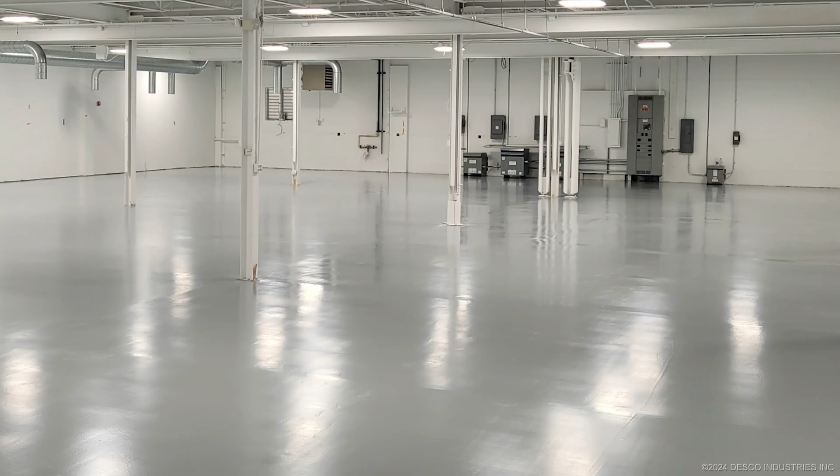Today we're going to give an overview of the Statguard conductive epoxy and everything you need to know about the application process. Statguard conductive epoxy is a waterborne, two-part epoxy floor coating formulated to control the dissipation of static electricity and provide a path to ground. Statguard conductive epoxy is very effective as a static control floor coating for electronics manufacturing, assembly, and storage.

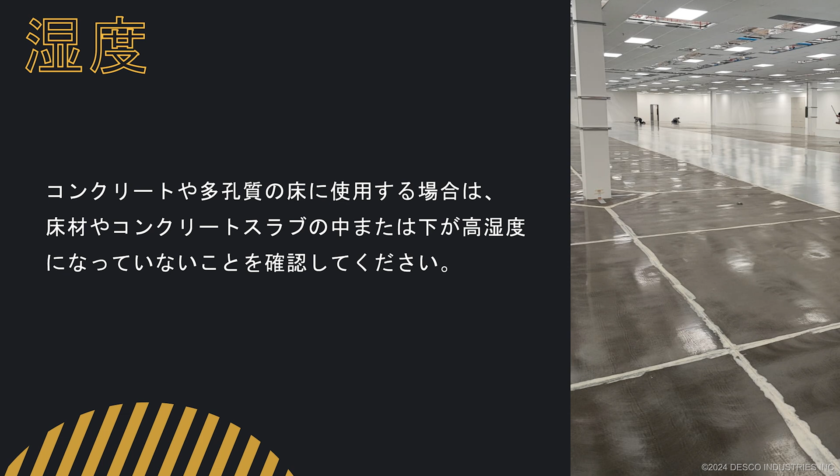For applications on concrete or porous surfaces, ensure there is no excess moisture in or below the material or concrete slab. Prior to installations, you will need to measure the MVTR of the concrete using the industrial standard test probes per ASTM F2170. The moisture levels cannot exceed 6 pounds per 1,000 square feet per 24 hours.

Ensure that your floor is porous and breathing well before performing the test. It is porous enough when a few drops of water dropped on the surface readily absorb within 30 seconds. If it is non-porous, then sand it with a very abrasive sandpaper to open it up. One test should be performed every 1,000 square feet of space.

For limitations, do not install when the relative humidity of concrete slabs exceeds 75%. And use only when the substrate temperature is between 65 degrees Fahrenheit and 85 degrees Fahrenheit. The proper floor pH before application should be 7. If the floor tests above pH 7, the floor must be neutralized before installing the Statguard conductive epoxy.

For concrete subfloor preparation, make sure to follow ASTM F710-11. In preparing concrete subfloors to receive floor coatings, fill all cracks, depressions, etc. with a leveling compound according to the manufacturer's specifications. Before beginning the application process, the surface must be clean, dry, free of oil, grease, release agents, curing compounds, laitance, other foreign matter, and must be structurally sound.

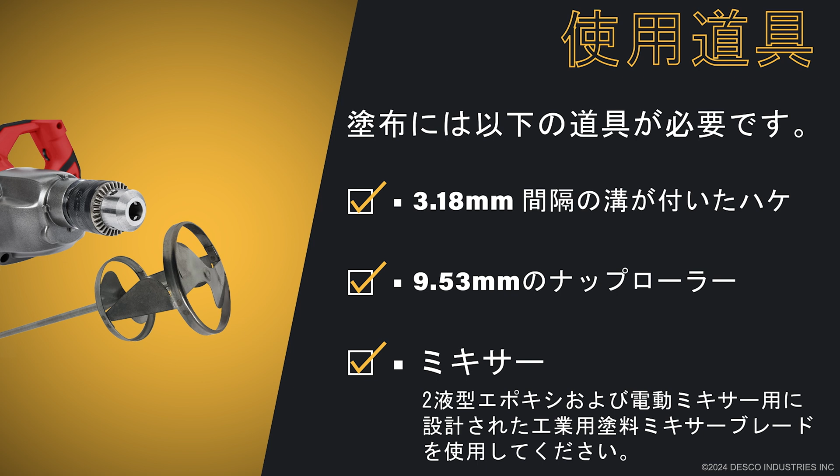For this application, you will need these materials: a 1/8 inch notched squeegee, a 3/8 inch nap roller, and a mixer tool. Use an industrial paint mixer blade designed for two-part epoxy and an electric mixer.

We recommend doing a test patch as it is a great way to demonstrate primer thickness options to gain the desired gloss. Test patch areas should be tested for adhesion and performance of the coating before applying coating to the entire floor. For more details on testing, make sure to view the technical bulletin posted below and on the Statguard flooring website.

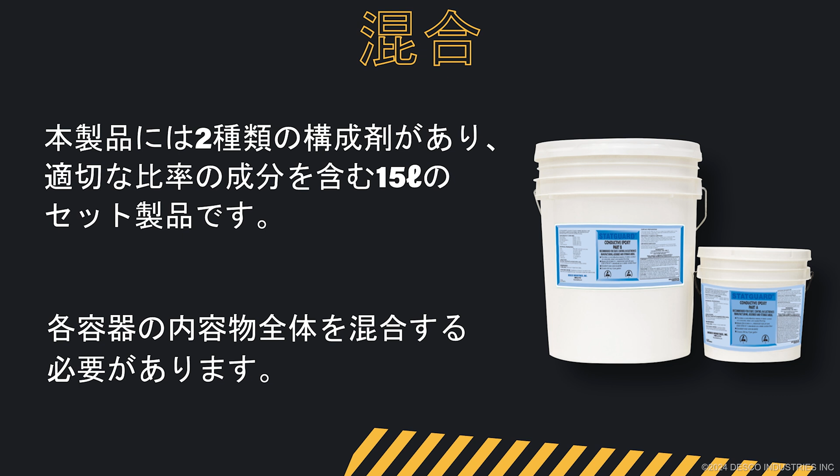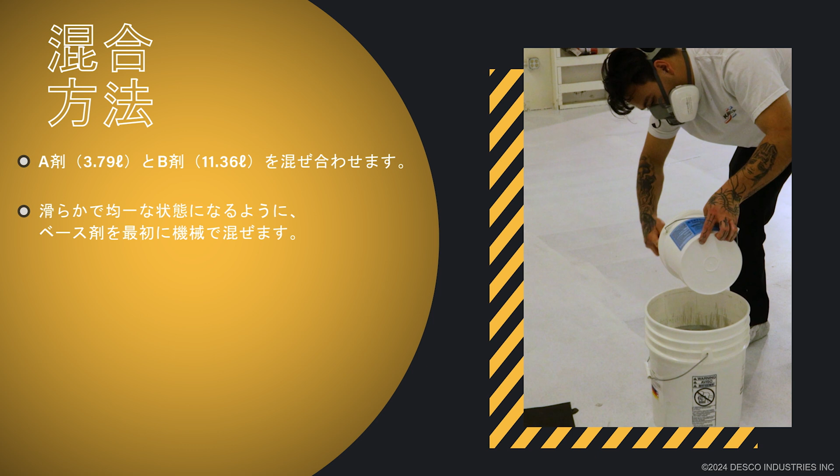Statguard conductive epoxy is a two-part product supplied in a 4-gallon kit which contains the proper ratio of ingredients. The entire components of each container must be mixed together. Mix part A, the 1 gallon, to part B, 3 gallon. Power mix the base portion first to obtain a smooth, homogeneous condition. After mixing base portion B, add the converter slowly with continued agitation. After the converter addition is complete, continue to mix slowly.

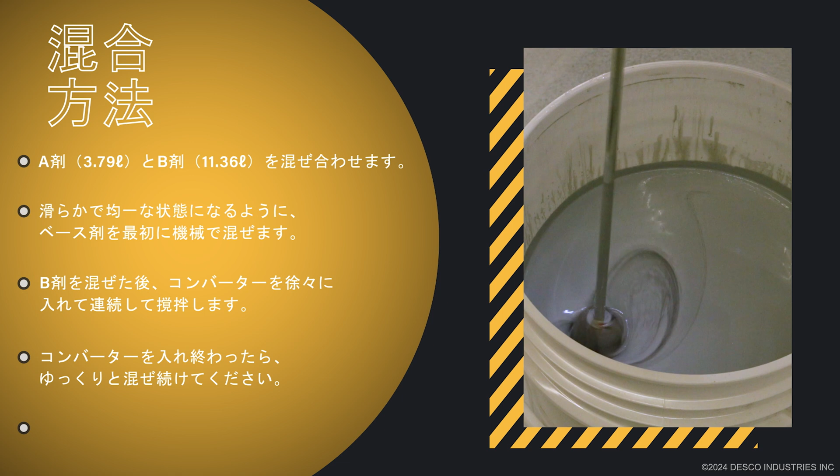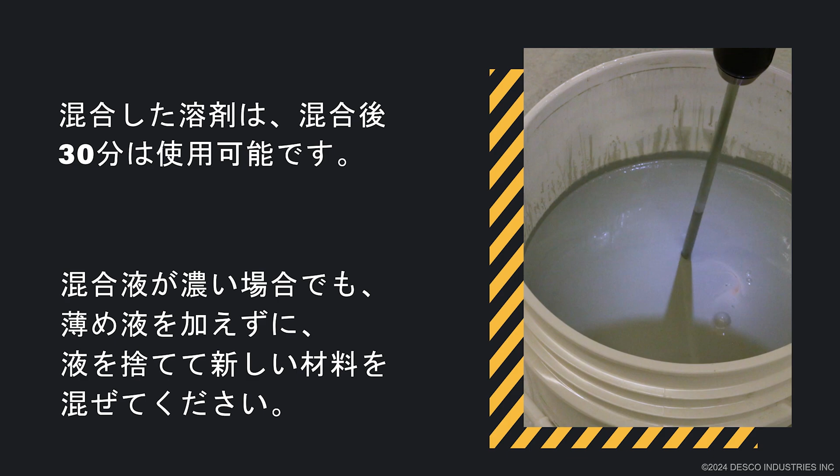Use immediately after mixing. Mixed material is usable for 30 minutes after mixing. If it thickens, do not add thinner, but discard and mix fresh material. Caution: thinning is not recommended. Adding water will reduce conductivity of the coating.

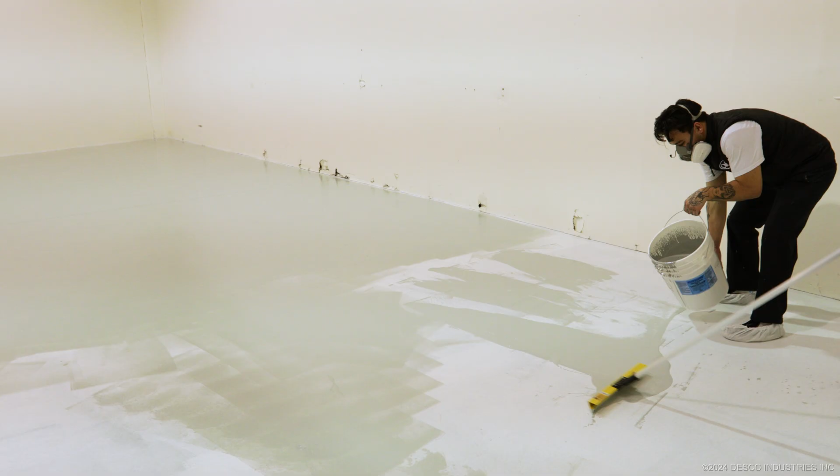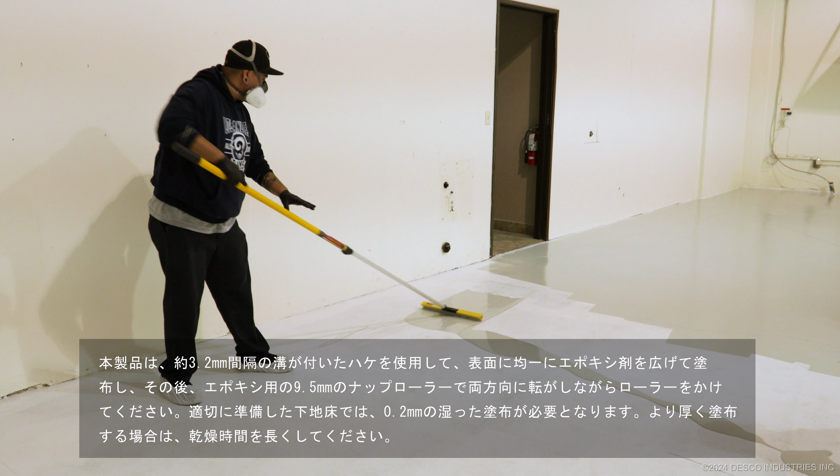Statguard conductive epoxy should be applied using a 1/8 inch notch squeegee to spread the epoxy evenly on the surface, and then back rolled in both directions with a 3/8 inch nap roller. With a properly prepped subfloor, only 8 mil wet coating is needed. If a thicker coating is applied, the dry time will be longer.

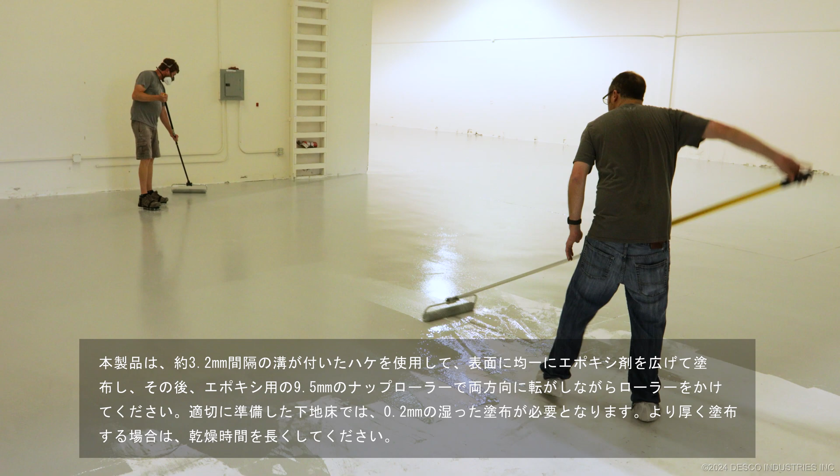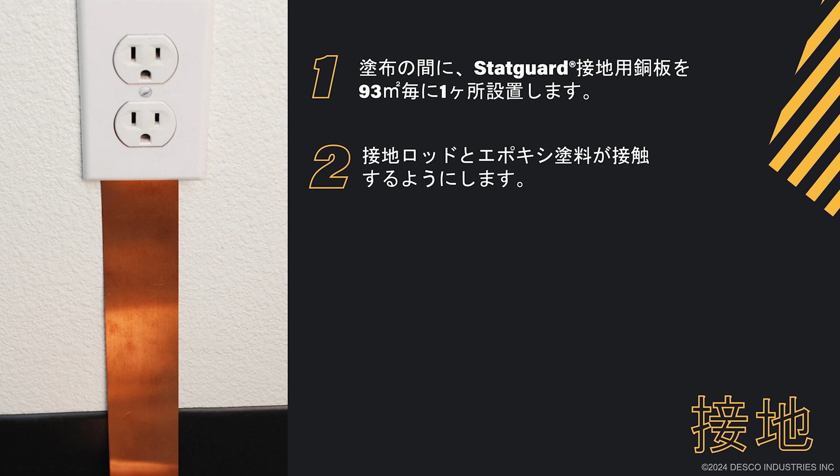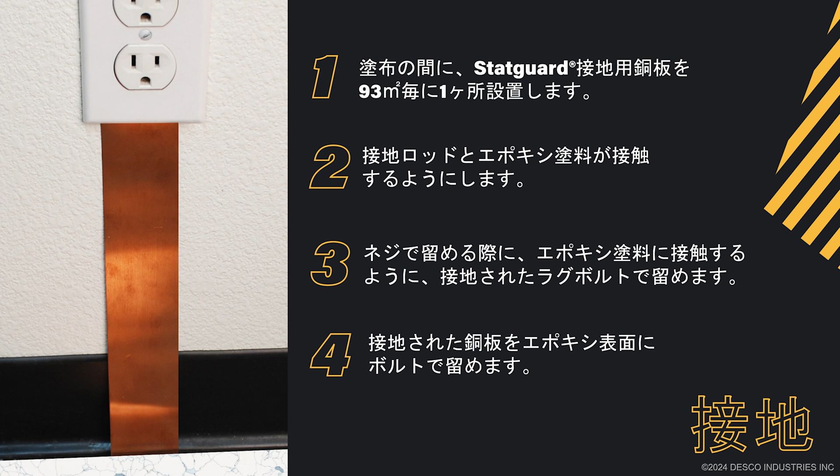There are 4 examples of how to achieve a grounded connection to the epoxy surface. One is installing a Statguard copper ground strip per 1,000 square feet throughout the installation. Second is bringing the epoxy coating in contact with a building ground rod. Third, install a grounding lag bolt to the floor so the bolt comes in contact with the epoxy when screwed in place, or bolt a grounded metal plate to the epoxy surface.

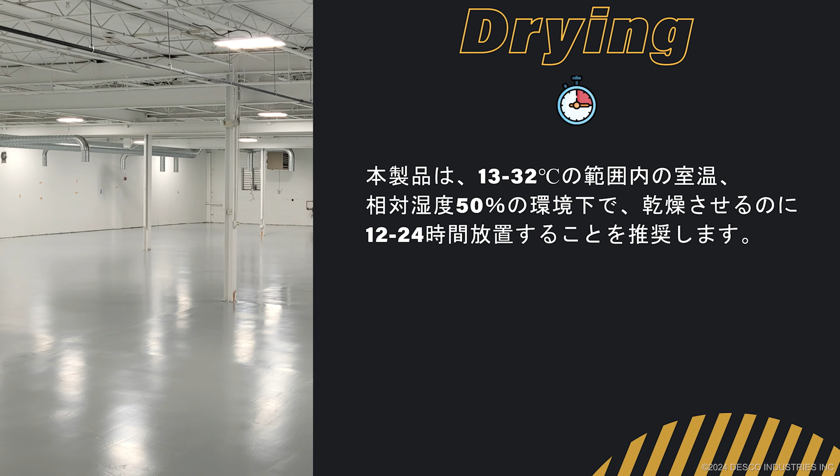Allow Statguard conductive epoxy to dry for 12 to 24 hours at a temperature in excess of 55 degrees Fahrenheit and under 90 degrees Fahrenheit with 50% RH. Depending on the conditions, it will take 3 to 7 days for complete cure and hardening of the coating.

Statguard conductive epoxy can be overcoated or sealed with Statguard dissipative floor finish to increase durability, enhance shine, improve ease of maintenance, and seal out dirt and debris. 2 coats are recommended. 3 coats will improve electrical properties and durability, and reduce frequency of maintenance.